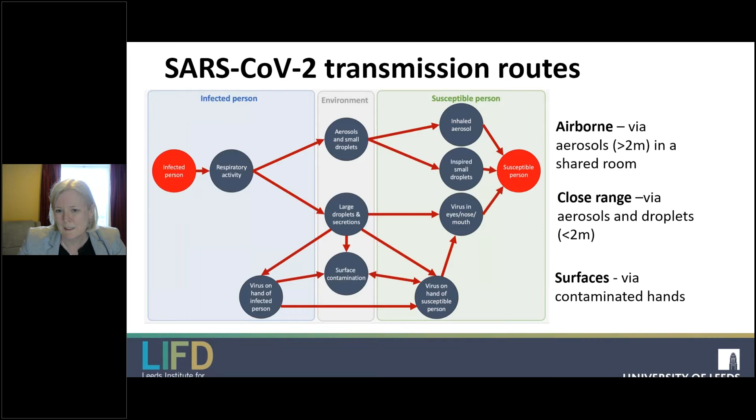And even just looking at this diagram, you can see that there's some complications in here. We're dealing with a disease where there are 3 or even more transmission routes, which are all a complex interplay of people and their environments. We also know a number of risk factors. There's good evidence that being closer to somebody increases your risk. It's quite likely that being face to face also increases risk because you're more directly exposed to their exhaled breath. We know risk is much higher when people are indoors, and we think it increases with poor ventilation. It's hard to exactly pin that down, but there's evidence pointing in that direction.

We also know that risk is likely to increase the longer you spend with somebody, particularly if you're very close with an infectious person, and that's why household transmission is a particular concern, simply because you're spending a lot of time in the same environment. And there's evidence that certain respiratory activities, vocalization activities, make risk higher. When people are singing or speaking loudly, they're generating more aerosols, more likely to cause transmission. There's also some evidence from exercise classes suggesting that those which are more aerobic, with a higher breathing rate, are more likely to result in transmission.

Crowding doesn't so much affect your individual risk beyond the fact that there's a higher chance that there'll be somebody infectious in that environment with you. But crowding enables a greater level of transmission, so it is a big issue from a population level perspective as to how this disease transmits more widely.

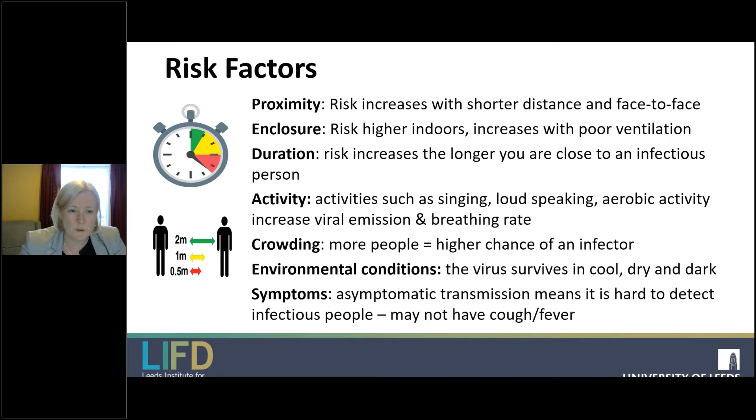And then we also know that it's very difficult to pinpoint people who are infectious. People pass on this disease before they show significant symptoms. So that may mean they remain asymptomatic, or it may mean before they are actually showing any symptoms. So you don't have to have a cough and a fever to necessarily pass the disease on. So all of these things actually make life quite difficult, because the virus thrives where you put people together.

The evidence that we've got is all quite mixed. So we get the evidence from a whole range of different sources, including things like ONS surveys, from the test and trace type systems, through outbreak investigations, and through lab and mechanistic experiments and models.

We do know from animal studies that both air and surface routes are possible, but we can't quite separate out yet how much the air matters versus the surfaces. It does seem that through air is more effective, but we don't know what droplet sizes matter most in those animal studies. Good consensus that it's highest risk in close proximity.

It does seem that the sort of random surfaces, you touch a surface in the supermarket, there doesn't seem to be very much evidence that transmission happens that way. It's not to say it can't, but it doesn't seem to be driving transmission. So if there is anything from surfaces, it's very likely that it's from those that are immediately surrounding an infectious person.

We have also seen super spreading outbreaks, so we've seen a number of these. It's quite likely that the air plays a big part in that. What we don't know is how frequently these matter. Are these incredibly rare events, or are these really quite significant? And the problem here is a reporting bias, in that you are more likely to identify and detect these very large outbreaks rather than the routine sort of what's happening on a daily basis, and they do then get over-reported.

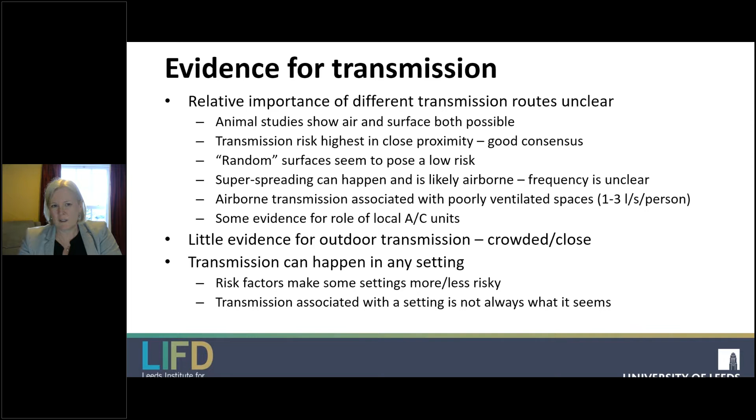I should also highlight as well that transmission is not always what it seems. So it's very easy to see there's an outbreak associated with a particular workplace and immediately think, oh, well, that workplace must be badly designed, badly ventilated. But when you start going through the detail of those outbreaks, often what you find is some of that transmission happened within the workplace itself, but other transmission happened because people travelled in cars together to get to work, or socialised together, or lived in the same house together. So there's always a little bit more to it than it can immediately look, and we always have to bear that in mind.

Let's go back onto how it transmits and think through how this happens. So we've got our source of transmission. That might be a cough, it might be a sneeze, it might be breathing, talking. In a hospital setting, it could be to do with treatment.

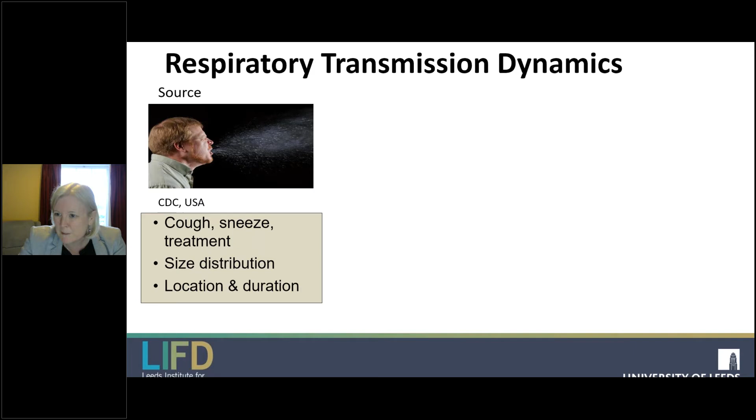Whatever it is, it's creating a particular distribution of particles carrying virus, and that will be emitted from that person over a particular duration of time and for a particular location. They may only emit for a very short period in a particular place, or they may be emitting for a long period of time. Once those particles go in the air, they get transported, they will deposit. It will depend very much on the airflow dynamics and the particle size, and then ultimately expose people.

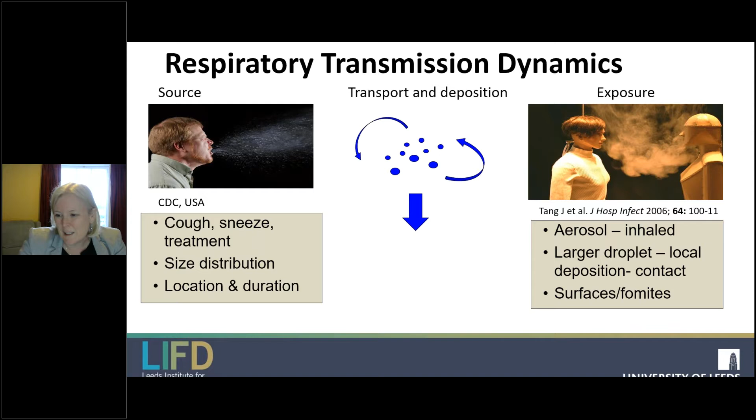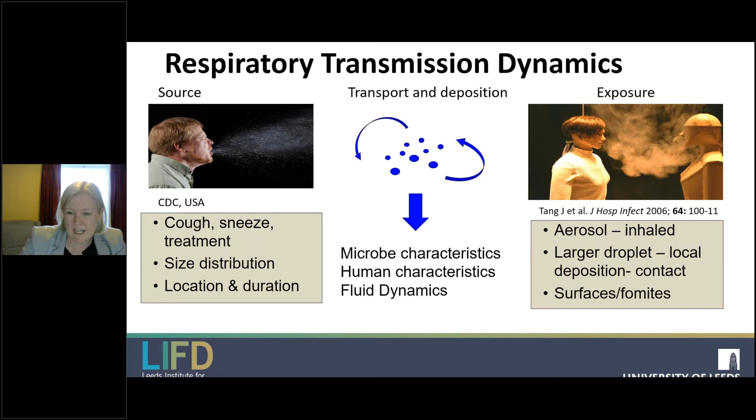And that exposure might be through smaller aerosols which are inhaled, the larger droplets which hit people's mucous membranes, and then surfaces and fomites. And the whole thing is really complicated. So it's this whole complex interaction of microorganism, human characteristics, and the airflow dynamics in that space.

We've got a little bit of evidence of where it has been found in the environment, but it's quite hard to rely on this because it's quite sporadic. On surfaces, it can persist as RNA for quite a long period of time, several days. Doesn't necessarily mean it's infectious. In the air, it won't persist because it will only be in the air when somebody infectious is present in that space, and for maybe half an hour or so afterwards, depending on the ventilation in that space.

So if you go and try and sample in the air, it's actually quite hard to find it. You've got to be there right at the right moment in time to capture it. But there are studies that have found it on surfaces. There are studies that have found it in the air. Very few of these studies have managed to culture any of the live virus, but there are, I think, maybe 2 studies now that have cultured live virus from the air, and 1 or 2 that have cultured it from surfaces. Most of this data is from hospitals, and there's very little from the community settings.

Also, an awful lot of this is relatively early on in the pandemic, but there is more and more data starting to appear now. But it's actually very hard to do this sampling, hard to do it accurately. There are a lot of differences between sampling methods that people use, and that might be a lot of the reason why we're not seeing the environmental detection.

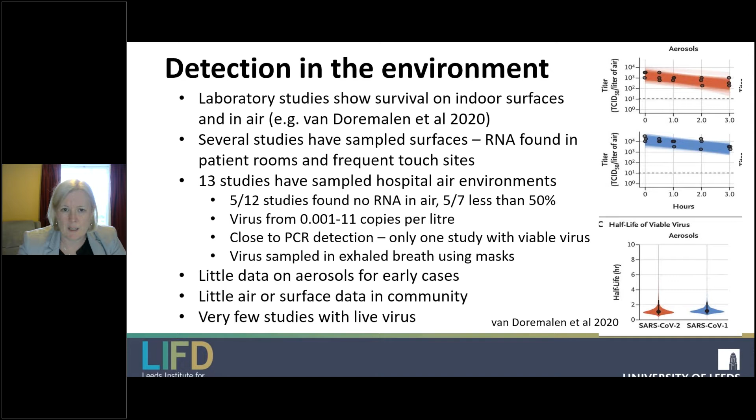Just to go back to the respiratory aerosols, the virus itself is only about 100 nanometers in size, but it's not a naked virus. It's contained within respiratory fluids. So we're really mostly interested in those particles that are in the sort of 0.5 to maybe up to 100 micron size. Those are the ones that are going to pose the greatest risk.

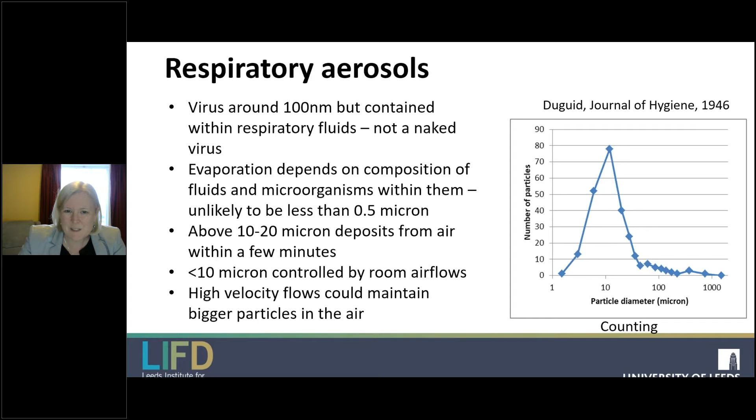We also have to bear in mind that particles are not viruses. So we need to relate these to viruses. We don't yet have data for the SARS-CoV-2 virus, but we do have some data for other pathogens. This was collected by Professor Don Milton in the US, who looked at the influenza virus in different sizes of particles. And again, what you can see here is he found it in small aerosols, less than 5 micron. He found it in larger aerosols, more than 5 micron.

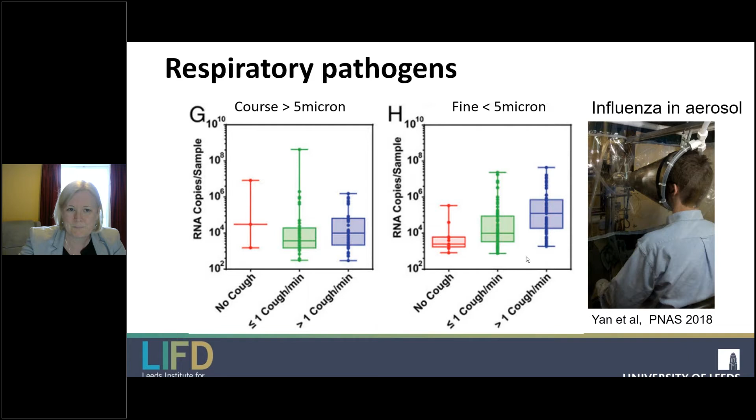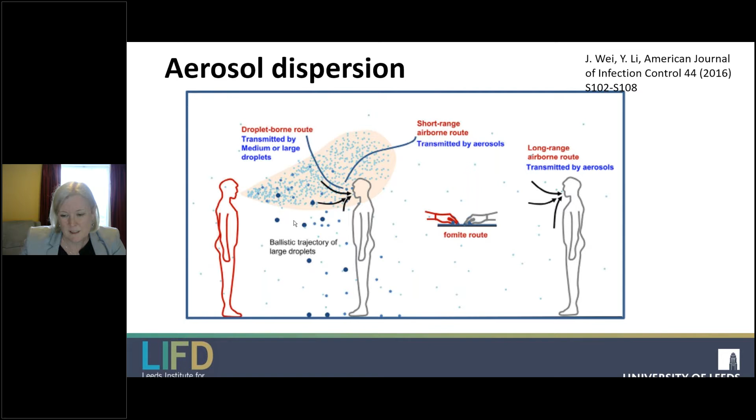So once these aerosols are in a room, we need to think about where they go. And this is, again, the complexities of the fluid dynamics of it. When you're very close to somebody, you're going to be exposed to much higher concentrations of all particle sizes, both the small aerosols and the larger droplets, which will deposit out. When you're further away, you're going to be exposed only to those smaller aerosols that are able to stay in the air for long periods of time. And how this happens is a complicated mix of all of the flow patterns that happen in that environment, most complicated in the vicinity of the person who's infected and their exhaled plume of air.

So thinking about the engineering side, as this is what most people in this space do, in all of these spaces, we should be thinking about applying this hierarchy of risk controls. So actually trying to prevent the people being in the environment, trying to prevent the infection being there in the first place through elimination and substitution methods are critical. But then this is where we come in, and this is the engineering controls, which sit above those controls which rely on human behaviour. So all the things like cleaning regimes, marking spaces out, even wearing face masks, all of those rely on human behaviour. And if we can get the engineering controls right, we provide a base level of protection that then supports other methods to be used. So we shouldn't be totally reliant on the human behaviour aspects.

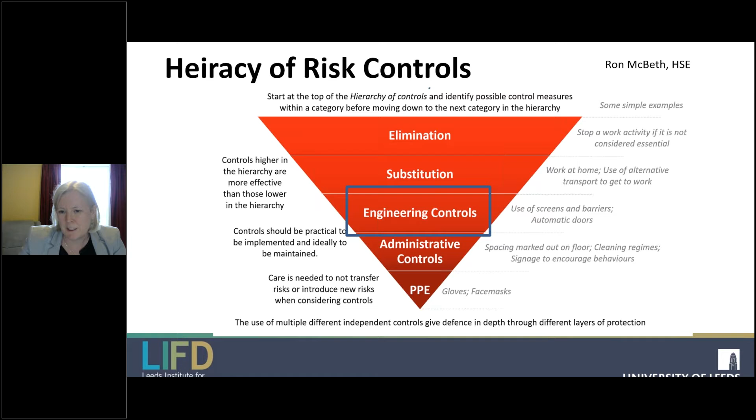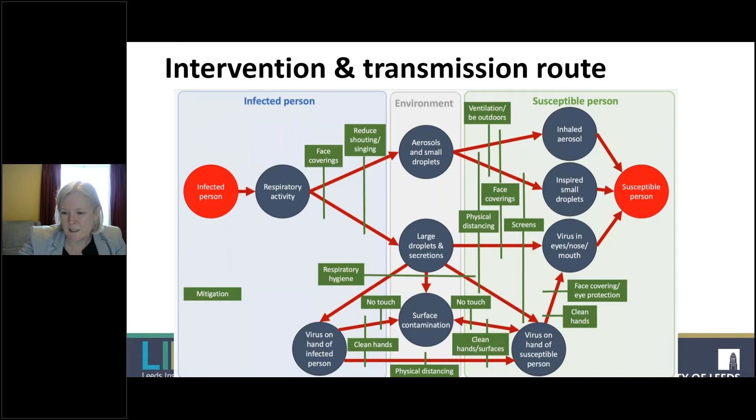And that range, the engineering controls obviously are very significant, but we also need to think, where do these controls matter in the diagram of transmission? And I know this is quite a messy diagram, but we need to recognise that some controls will act against more than one transmission route. So face coverings can act against multiple transmission routes, albeit they're very dependent on human behaviour. Cleaning can only mitigate the transmission routes via surfaces and hands. Ventilation can really only mitigate the transmission via the very smallest aerosols. And the larger aerosols, and when you're very close to somebody, can really only be mitigated through physical distancing, face coverings, and potentially screens if they're designed correctly. So we need to think about making sure interventions sit in the right place. We need to know which transmission routes they're blocking.

So from an engineering perspective, the major one here is going to be about controlling airborne risks through ventilation. And that's not just simply saying we're going to ventilate. There's an awful lot more to it than that, including the air distribution, the pressure, the different temperatures and humidity, etc. But we also do have virus inactivation technologies, and particularly of importance here is the air cleaning technologies.

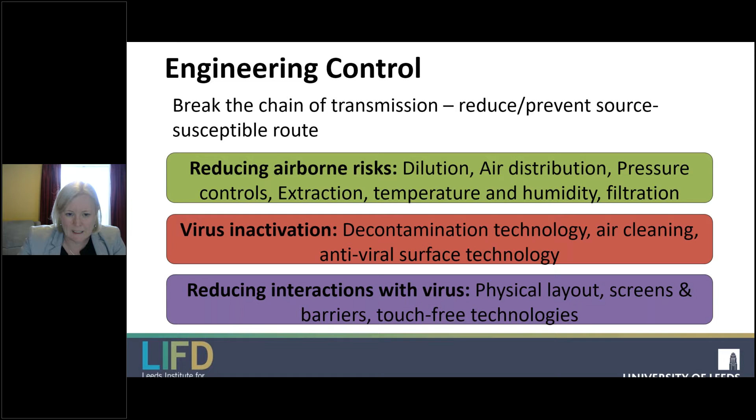So how can we assess this exposure? What do we know about it? So again, another picture shows just that massive complexity of what happens in a real space, but we can simplify some of this. So we can do some fairly simple mathematical models to say, okay, well, if we've got an emission, we've got a ventilation rate, we can calculate what happens in a space over time. We can start with an assumption of a fully mixed space, and we can then start to say, well, how can we look at the role of different interventions in here.

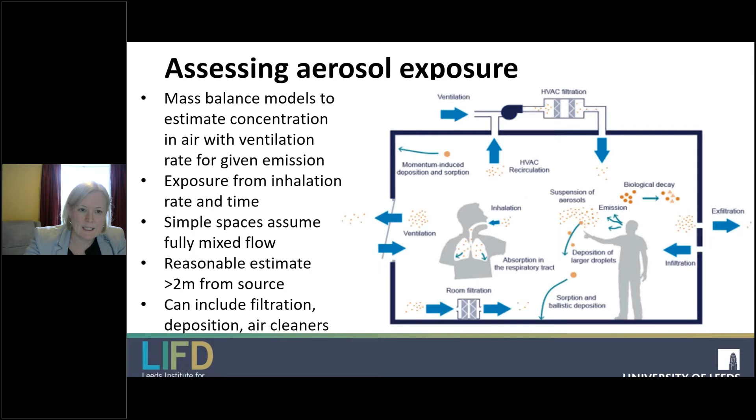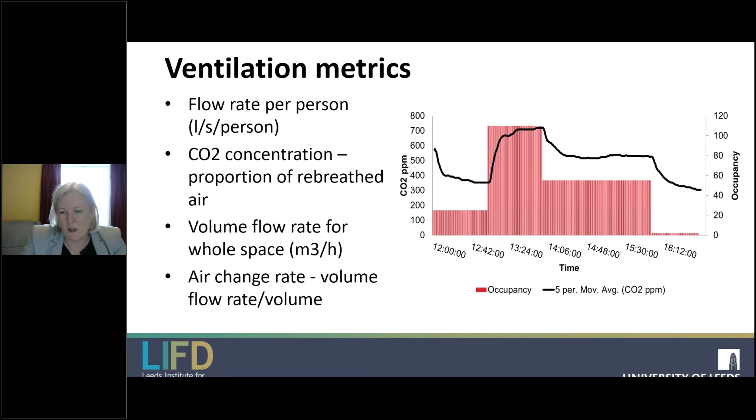But if you measure that same thing in a room with only 2 or 3 people, you'll get a lot more variation and a lot more spikes in it. And then just to show that it's not as simple as just saying a ventilation rate either. So the size of the space matters. Again, this is a theoretical model, but this is to say, well, what concentration of virus would be in the air? I've done it as relative concentration.

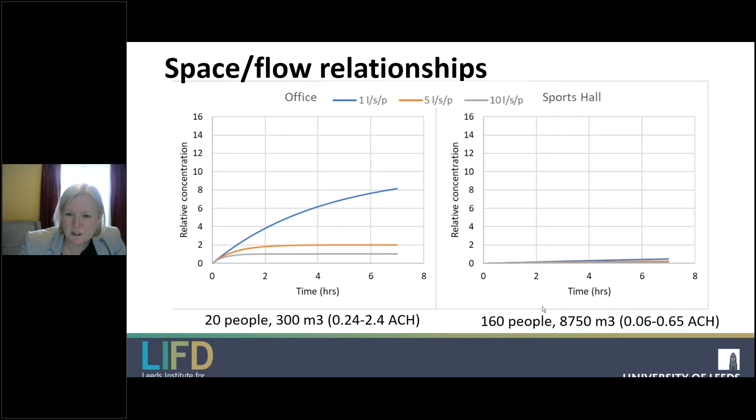So we need to be quite careful about actually just saying, well, there's a single number in here, a single air change rate or a single ventilation per person, because those relative concentrations you'd be exposed to are going to be really quite different depending on the size of the space. So I think it's telling us we need to be thinking about different spaces differently and a bit more bespoke consideration of the risks. And actually we've started to look at this.

That was relative risk. Can we do absolute risk? The answer is I think the jury's still out on absolute risk. There are models we can use. There's a Wells-Riley model which you can use, and it requires data on the infectious dose, and you need a certain amount of outbreak investigation data to calibrate this, and I don't think we've got enough of that yet.

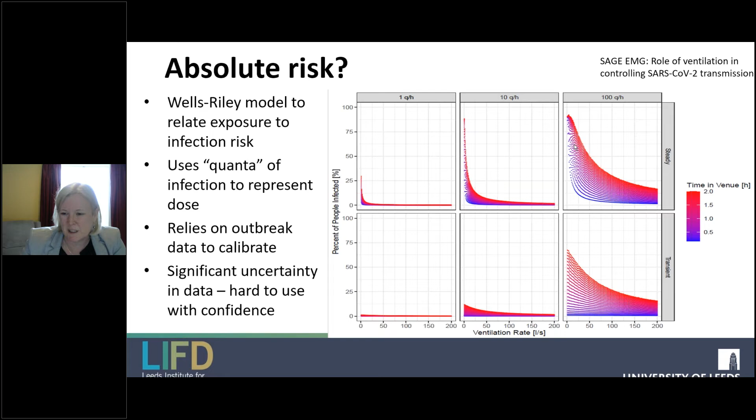We've kind of only got the extremes in here, and what you can see is, even in this very simple model here, it's a bit complex, but we've got ventilation rate along the bottom, we've got percent of people infected, and we've got different levels of infectious quanta which are being emitted. And you can sort of see that you could go from almost no risk in a space to having sort of 80% of your people infected, depending on the emission rate of a person and depending on the duration of time spent in a space. So it's very hard to get to absolute risk yet with this disease.

I've talked very much about fully mixed models there. We know that real spaces are much more complex than that. They are connected. We've got air distribution between zones. We've got air distribution patterns.

We might have displacement ventilation. If we've got naturally ventilated spaces, we know that these are incredibly variable. And we know that there's also influence locally from people and heat sources. So it's actually quite difficult to specify a ventilation rate. It's even more difficult because we know that it's actually very hard to measure this.

So it's all very well if I said, yeah, aim for 10 litres per second per person, but then how do you prove that a space has got that? If we've got a mechanical system, we can do a certain amount of that through measuring the grilles with a balometer or similar. It's quite hard to do tracer testing in real environments. It is possible. And then CO2 is quite commonly suggested as a proxy, which is useful in some spaces, but I think it's only ever a guide.

It's very difficult to relate this to an absolute certainty, and it's going to be dependent on the people, their activities. Some people breathe out more CO2 than others, so spaces with small numbers of people are quite variable. The flow rates, even then thinking about the accuracy of sensors and how we can compare between them. So there are a lot of challenges in here, and I think some of the things that as a sector we'll have to think about more over the coming months and years as to how we do this more effectively.

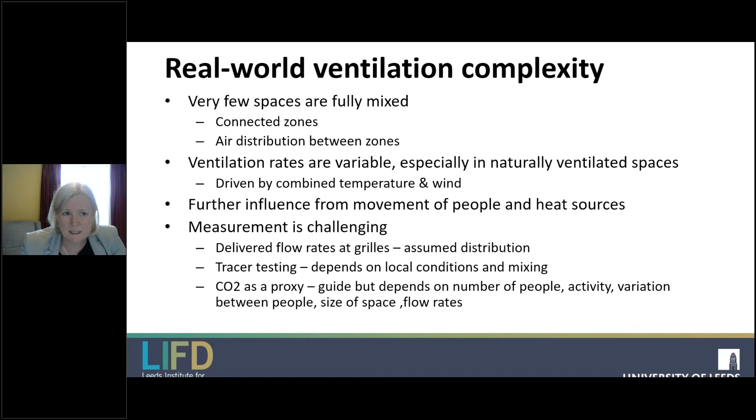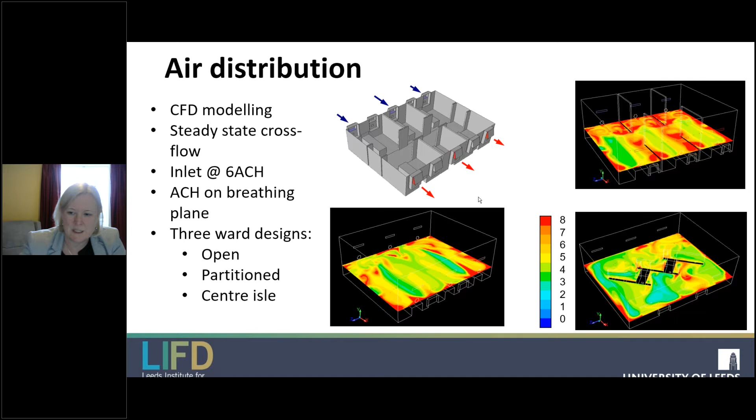And just to illustrate that if it was fully mixed in here, we would be seeing sort of yellow color all the way through. And the fact we're not, in fact, you see pockets of higher and lower ventilation rates, tells us that that space is not well mixed. And particularly one where you've got a center aisle, you've got a whole zone which gets blocked by the structure in the middle of the room. So, you know, we need to be thinking about the mixing of ventilation, because this is going to be important too. I've mentioned air conditioning units.

There are a couple of studies which have highlighted the potential role of air conditioning units. So the study on the left, this was published fairly early on in the outbreak, and this is from China, just about a year ago, actually, almost to the day. 10 people infected in a restaurant. The people in the rest of the restaurant were not infected, and it was highlighted that there were air conditioners that were creating a particular zonal flow in part of the restaurant, and this may well have done two things. It may well have kept larger particles airborne for longer, but it may have also just continuously redistributed air in one particular part of the restaurant.

A key thing with this one is, although it was very much blamed on an air conditioner, when you looked at the actual ventilation rate of the whole restaurant, it was almost nothing. They basically had one extract fan for the whole restaurant, and it was around about 1 litre per second per person, so very, very low actual ventilation rates.

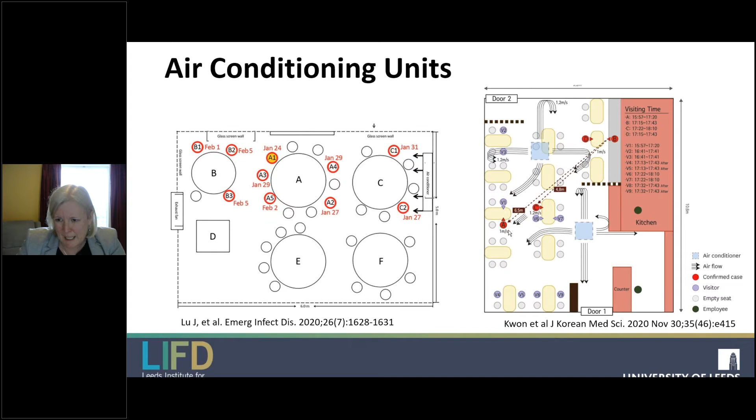Another much more recent one from a Korean study showed that people were infected within 5 minutes, and in a very directional position from an air conditioning unit, and that really is suggesting that it is quite likely it was maintaining larger droplets which are carrying more virus to be airborne for longer, and then people were able to inhale those larger droplets.

I want to finish up by just talking about air cleaning, because I know there's a lot of interest in this. There are huge numbers of different technologies in here for different types of air cleaning, and we need to really think through what the purpose is. So the purpose is removing and inactivating the microorganisms. It's not a reason to reduce ventilation. It's a reason to actually mitigate where you can't ventilate effectively enough.

There are systems which are designed for occupied spaces. So some of these systems are applied within the HVAC system or as a local standalone device in a room. Others are designed for unoccupied spaces. And I think they are very, very different. They are for decontamination, and there are very different considerations in there.

As far as the technologies go, there's fairly good evidence for HEPA filters and for UVC. Far UV looks promising. Some of the other technologies may well inactivate virus, but there are bigger risks that they cause additional problems. So I think with all of these, there are a lot of questions that need to be asked. As in, what's the real efficacy of it? What's the evidence for it? We have very little evidence for real world reduction of infection through any of these technologies. I suspect the only one is some of the UVC studies on tuberculosis and influenza, but very, very little real world evidence for reduction of infection. An awful lot rely on lab data or proxy data.

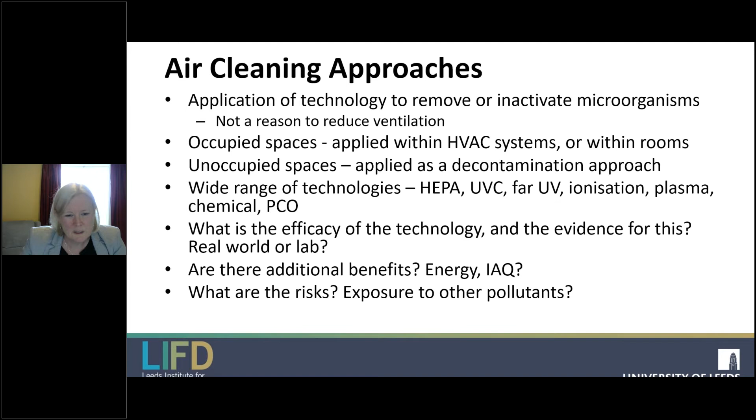But it's very important also around what are the risks. So what are you exposed to because of these? Is that exposure to UV light because of a bad installation? Is it exposure to secondary pollutants like ozone or ultrafine particles, which some of these units are likely to generate? And who's exposed to them over how long? I think the other risk to consider is if you put one of these in a space, do people treat it as a magic bullet and believe they are now protected and forget about some of the other mitigations that they need to apply?

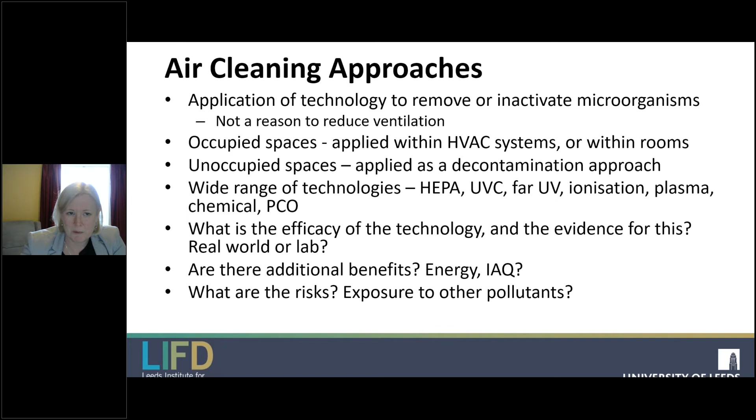I do want to just touch a bit more on the detail of air cleaning devices. So do you apply it in the ventilation ducts or in the room? If you apply it into the supply air in a hospital type setting where you've got very high risk patients, this can be quite effective, particularly if you're protecting them against environmental microorganisms. It could also potentially be effective where you've got recirculating systems in buildings, and of course some of these devices actually have additional benefits in terms of the performance of the HVAC system. So UVC, for example, will keep a cooling coil cleaner and potentially improve your system.

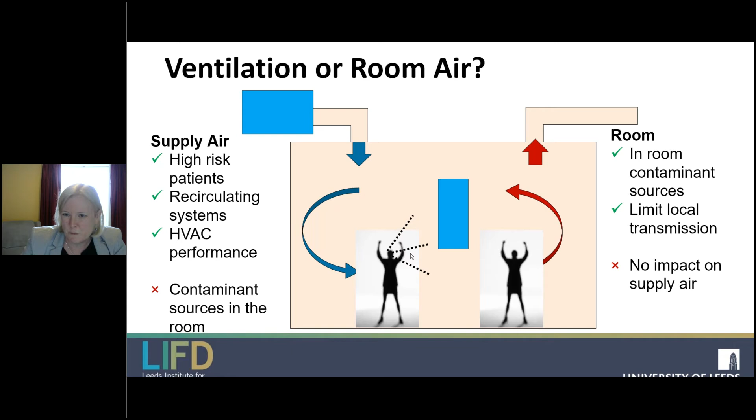But they have very little impact where there's contaminant sources in the room. So if one person in the room is going to affect another person in the room, it really doesn't matter that much if the supply air is clean, if the source of the contaminant is the person in the room. From an in-room perspective, in-room devices are much better suited to dealing with that local contaminant and being able to reduce the local transmission, but of course they don't impact on anything to do with what's taken back through a ventilation system in a building.

Those systems that are in rooms, again, there's a lot of decisions to be made in here. We've got sort of portable units, which are consumer units, plug them in, move them around. The risk, I think, with those is that people move them out the way, forget about them, kick them over, position them badly. I would always be a bit more in favour of installed systems where you've actually thought about the design, you've thought about the positioning, you've thought about how it's going to interact with the air flows in the room, and provided a properly sized unit accordingly.

It then also means that the maintenance of a device sits with the building services rather than is reliant on an individual to change the filter in their own office, or a teacher in a school, do they change the filter? Who does that? So I think it is probably better to have the installed units.

Single pass units are basically, at the most simplistic level, a box with a fan in it that draws air through that box, passes it through some form of technology, and inactivates microorganisms. Many of these have a really high single pass effectiveness. They will kill 99.9% of what's in there. The real trick here is persuading the air in the room to go through it. So both the installed ones and the portable ones can be very effective.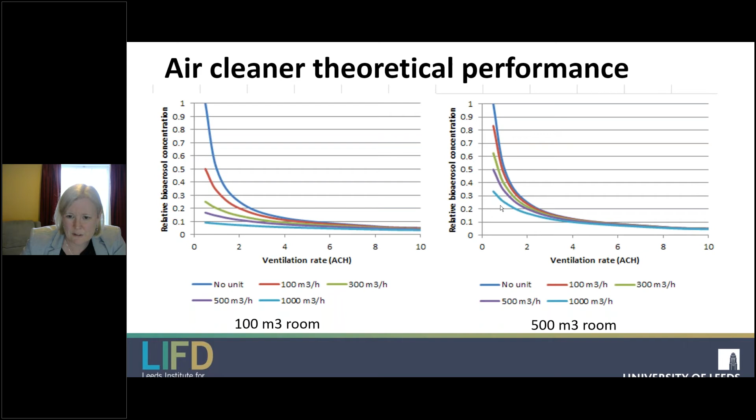And you'll see that it is most effective in a poorly ventilated space, so you get more bang for your buck if the space is poorly ventilated. Once you've got higher ventilation rates, you're really just not adding that much additional with your unit, and you get more effect in a small room than you are in a large room, which kind of makes sense in that you're able to get more air through it more effectively. But in a real world, the effectiveness can be a bit more complex than that.

This is some lab work where we've taken a microorganism, we've aerosolized it into a chamber, we supply the air low in this chamber, extract it high. This is a room scale chamber, so it's a 32 cubic meter chamber, and then we position devices either on the ceiling, on a wall, or close to the source. And what we saw both in the experiments and in some computational models is that when you position it very close to the source, on the whole you get much better results, although it's a little bit patchy here with the experiments. When you position it on the wall, again you get sort of reasonable results, but it drops off a bit. It drops off with air change rate.

When you position it on the ceiling, we actually got a result that suggested the concentrations had gone up, and they hadn't gone up. What we got there is the fact it has changed the distribution pattern in the room, so we were measuring a higher concentration at our sample point. So just to show that it's not as simple as just stick one of these in and this is what you get.

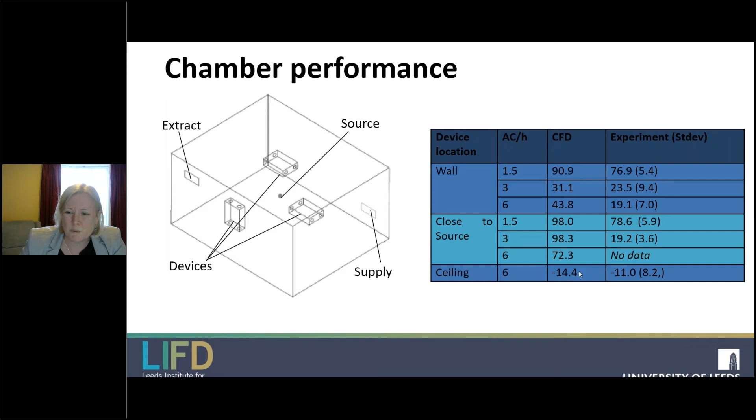I said I'd mention upper room. Upper room is a more complex system. You put ultraviolet light above people's heads, and it inactivates microorganisms as they pass through that UV field. It's a very complex mechanism for how this works, but basically it's a three-dimensional field of UV light. The airflow will interact with that, and depending on the microorganism species, you'll get a reduction in the amount of microorganisms that are live in the air and it will reduce the risk of transmission. It will depend very much on the environmental conditions. It depends on the dispersion of that microorganism.

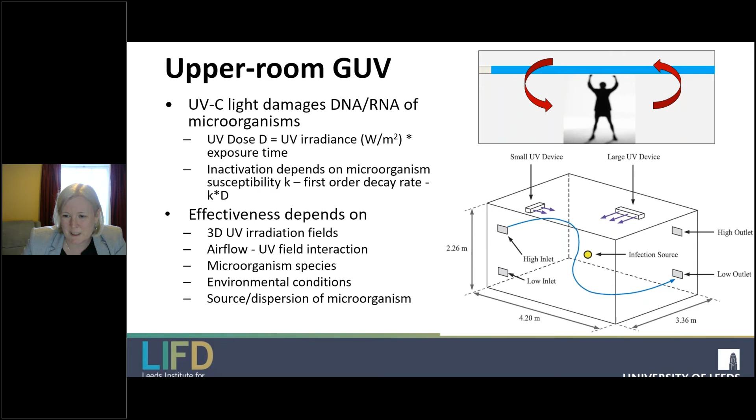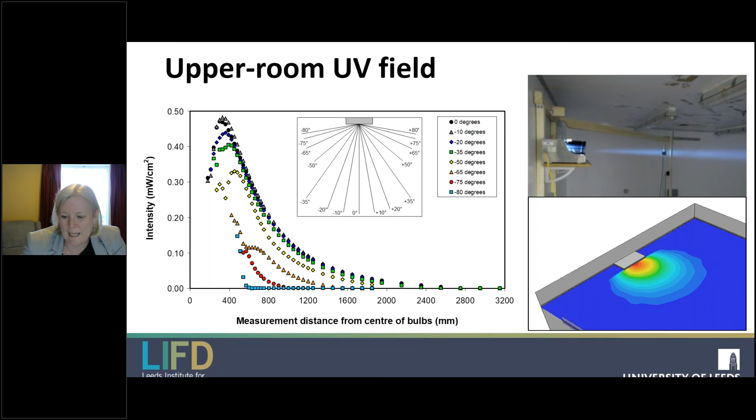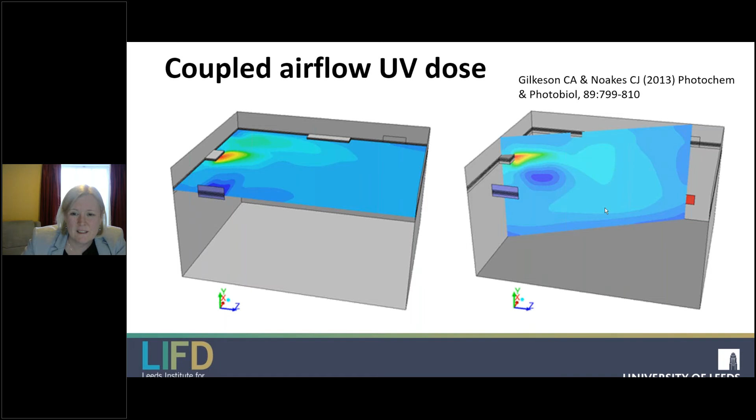And just to illustrate some of this, this just shows you one of these devices in a test room and shows you the UV field that you might get from them. So you can see it's a 3-dimensional field, and it varies particularly in the plane of the device itself. And if we model the flow, this is airflow in a room, we can model how that flow interacts with the UV light and distributes the effect of that UV light throughout the room. So it's a complicated flow pattern.

But if we look at some of these results, we can see that the effectiveness depends on how many device fixtures you've got. So in this room, we've got several fixtures which we can use, 2 fixtures or just a large fixture or a small fixture. But crucially, what you can see in here is that the effectiveness depends on the ventilation system in the room. So when we introduced the air at low level and extracted it at high level, we got a better performance than when we did it the other way around. And that's all to do with the ability for it to carry those microorganisms through the UV field.

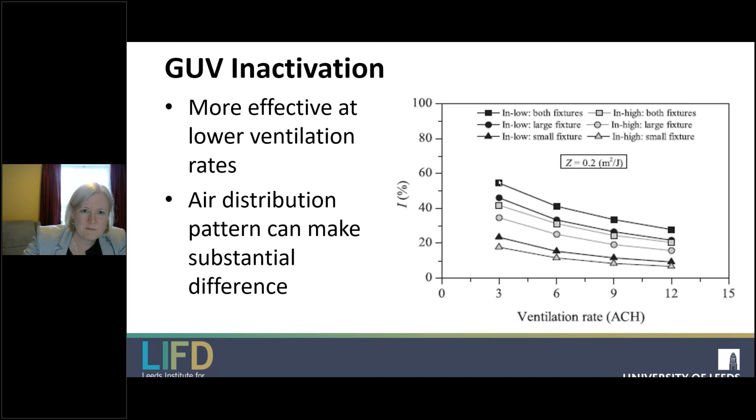So just to conclude, what do we know so far? We think that close range transmission through aerosols and droplets is the most dominant route. We think that far field aerosol matters, therefore ventilation really matters in here. But we need a lot more understanding of this. How do we characterize and measure ventilation in buildings? How do we understand the importance of the different air distributions? How can we actually quantify risks and therefore design proper systems to deliver good performance? And we also know that technology solutions may well help, but we need to have these correctly designed and deployed for the space they're in.

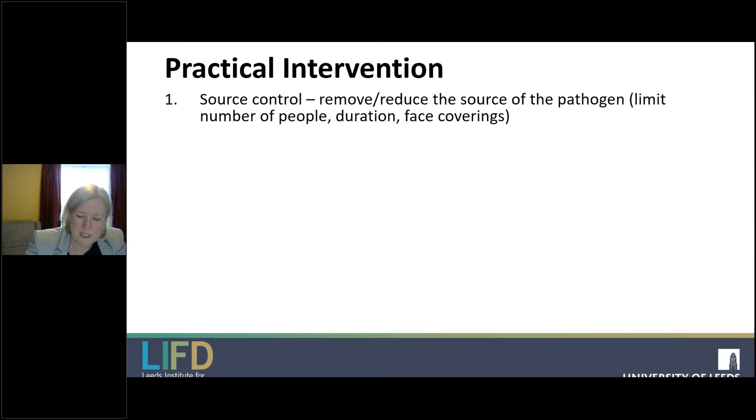And as a sort of practical take home, what do we do? Well, the first thing I would be looking to do in any space is reducing and removing the source of any pathogens. So if you can stop using the space, stop people going in there, reduce the duration of time they're in there, put face coverings on people, that's your first step. Then ventilation, to me, from an aerosol perspective, is the next step. And if we're going to do a hierarchy, I would very much be asking, where are the poorest spaces which are shared between multiple people? So I wouldn't necessarily be saying let's up the ventilation everywhere. I'd be saying let's go and find those spaces where the highest risks are and look at intervening there first.

Everywhere else, I'd be saying let's see if we can aim for something like 800 parts per million or 10 litres per second per person. There's no hard and fast rule on this, and we don't have an exact number. We can't give an exact number; you can never make the risk zero, you just reduce it. If we've got spaces where people are generating more aerosols, we need more ventilation, but we should first be asking, do we need those spaces to even be operating like that in the first place? Another critical one is a reliable and regular source of outdoor air. The spaces that worry me the most are those naturally ventilated spaces with no designed-in ventilation. Think about shops, think about restaurants, which entirely rely on people opening the door on a regular basis for their supply of outdoor air.

And then I think we need to make sure that whatever we're considering covers the systems and the human interaction with them. It's no good saying, yes, this system can deliver, if then the people in the space shut the windows or turn it off. So we need to make sure that people know why they need to use the ventilation effectively. And then given what we know about air conditioning, I would be very cautious about using air conditioning in poorly ventilated spaces. I think if the space is well ventilated, the risks are probably relatively low, but in poorly ventilated spaces, I'd be a bit worried about maintaining aerosols in that space for longer periods of time.

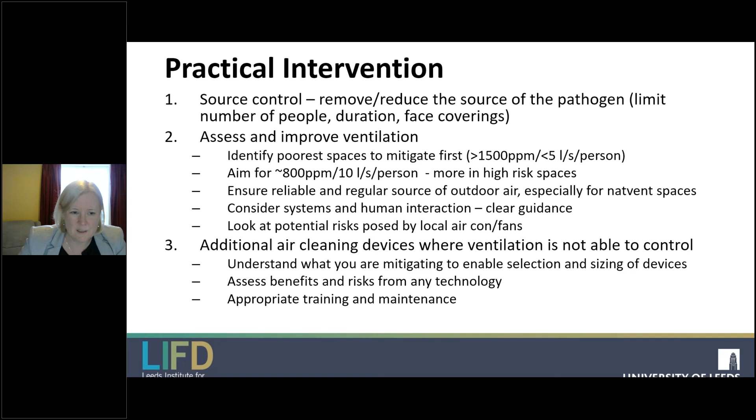So if we start rolling them out, we need to then do something with them and make sure they're used properly. And just to finally finish off, the future: this whole pandemic's put ventilation on a pedestal like we've never seen before. We all know that it matters well beyond COVID. It matters for health and well-being, matters for all of the other air quality parameters too, matters for your mental health, your physical health, your sleep, etc.

It also is one of the major determinants of the energy and carbon emissions from a building. And it's not sustainable to simply say, let's increase ventilation rates. So we're going to have to think much more carefully about how we design ventilation for effective higher ventilation rates than we've had before, but now with low carbon heat for proper sustainability in there.

And just to finish off by advertising, we have a new network on this where we are looking at how we can consider some of these outdoor-indoor air connections and the trade-offs, and how we can think about a more holistic approach to ventilation design for buildings in cities in the future.